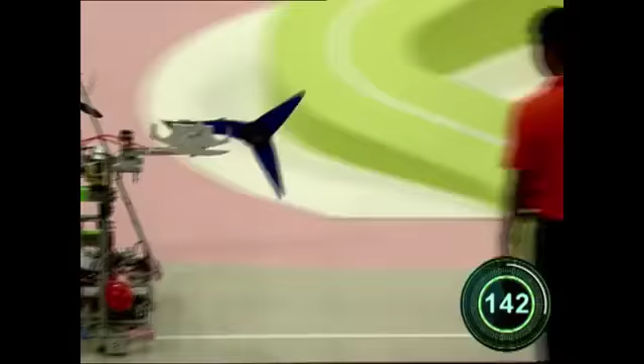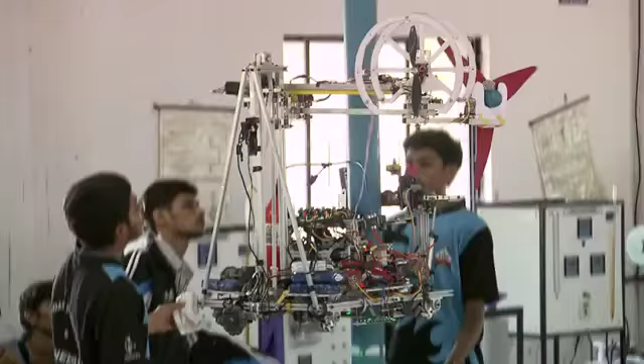It's ROBOCON time again, where human intelligence and the precision of machines join hands to put up a magnificent display of technological advancements in the modern world. Clean energy recharging the world was the unique theme chosen for this year's contest, emphasizing the need to use environment-friendly energy resources. The game field was a beehive of activity, and the eagerness of contestants and curious spectators was approaching a crescendo.

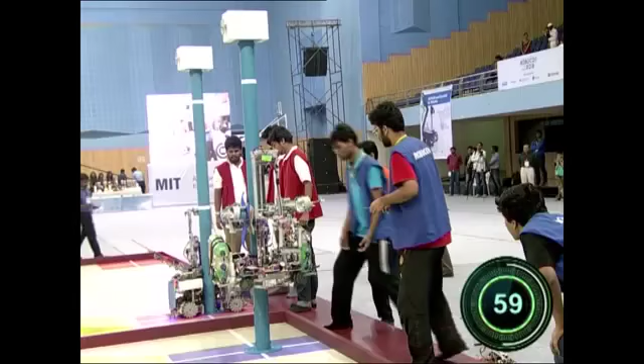The battle for supremacy was about to begin in this unique arena. Expectations were running high for both teams as the final match of National ROBOCON 2016 was about to begin. The battle was tough, with many make-or-break moments. 5, 4, 3, 2, 1, start!

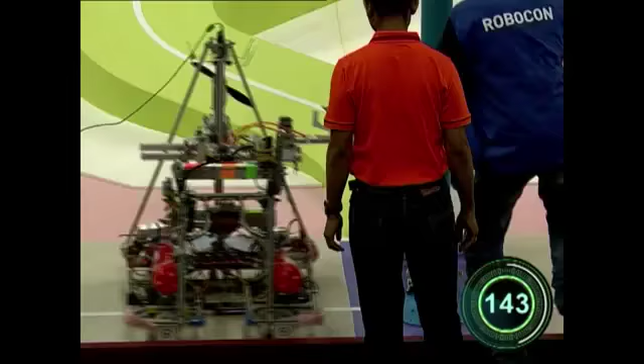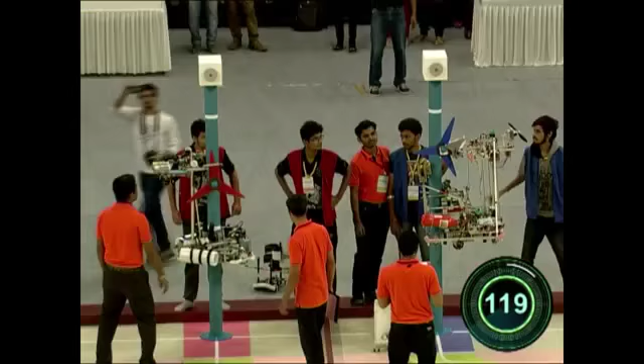Vadodara Institute of Engineering and College of Engineering Pune were two equally matched opponents, trying to outdo each other to win the coveted title of National ROBOCON Champion. It was a close match that could have gone either way, but finally the team from Vadodara Institute of Engineering emerged as the national champion in ROBOCON 2016. It is Vadodara! The Techno Champions of ROBOCON 2016 come from the city of Vadodara.

Vadodara was previously known as Baroda, the third largest city in the state of Gujarat. This city is a unique blend of ancient lineage and modern marvels. Home to the Gaikwad dynasty, the city has many structures like the Maharaja Palace. The Lakshmi Vilas Palace is a standing monument of the royal lineage of the city and is home to the Maharaja of Baroda and his descendants.

Known as an important cultural and industrial hub in Western India, this city is also home to the largest university in Gujarat.

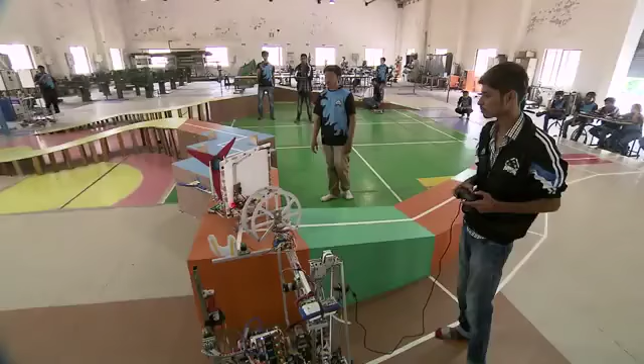One such premier institute is Vadodara Institute of Engineering, or VIER. Vadodara Institute of Engineering was established in 2009 with the objective of giving value-based quality education to students. The institute is situated in a serene and picturesque campus spread across 31 acres, a perfect setting for young and budding technocrats who wish to widen the horizons of their knowledge. Amongst these knowledge seekers were the national champions of ROBOCON 2016.

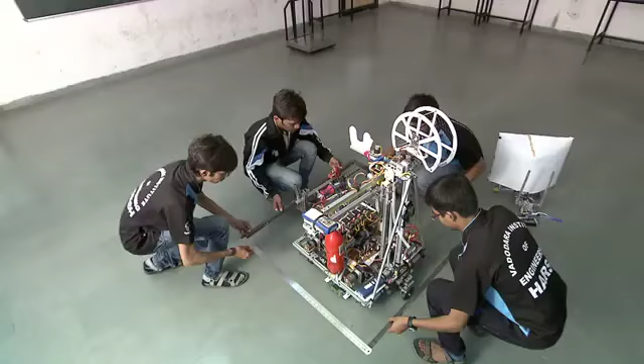A winning team is a unit that has perfectly achieved unity in diversity. This thought drives Team VIER, which has a perfect blend of students with multiple skill sets, focused on fortifying the team's strength with their individual expertise.

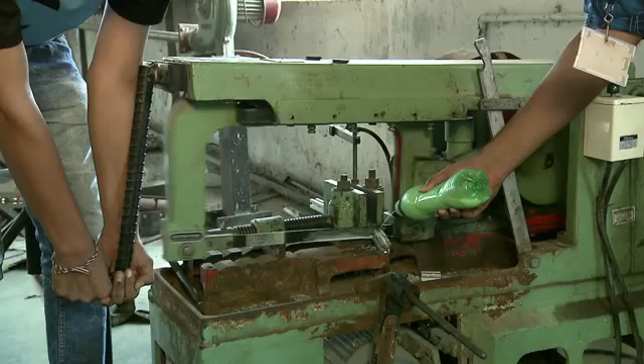Every team is as good as the mentor who guides them. Hence, the role of the faculty members was very crucial in grooming the VIER ROBOCON team.

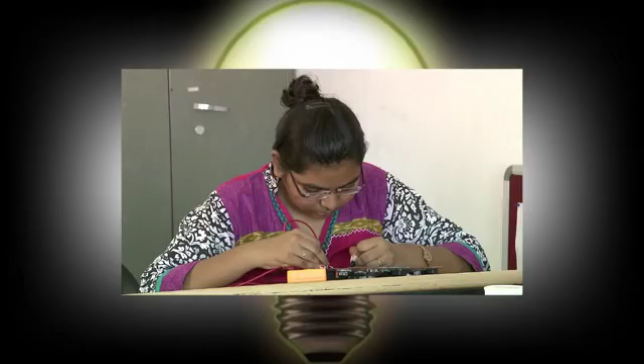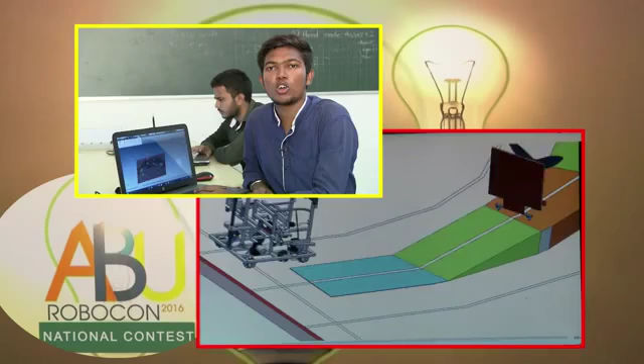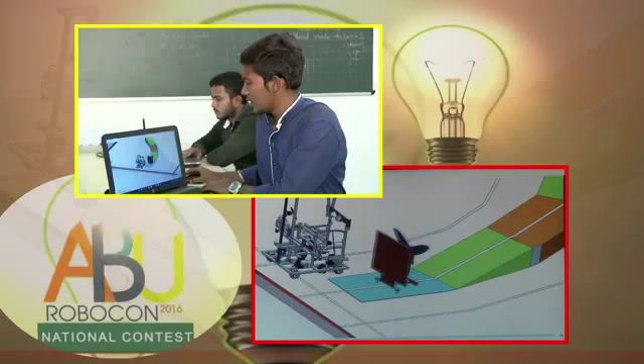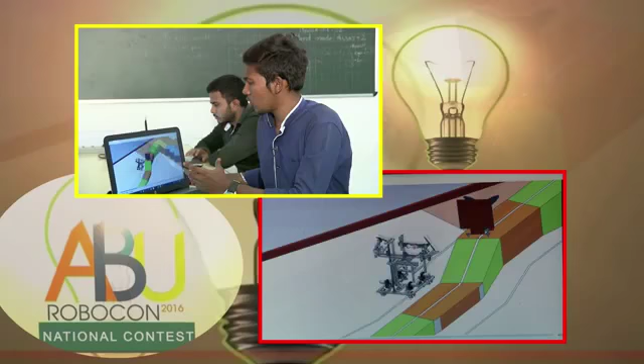Faculty members are the guiding posts in the chaos of creativity and competition, keeping the team grounded and in sync with the unified vision needed to tackle the problem statement at hand.

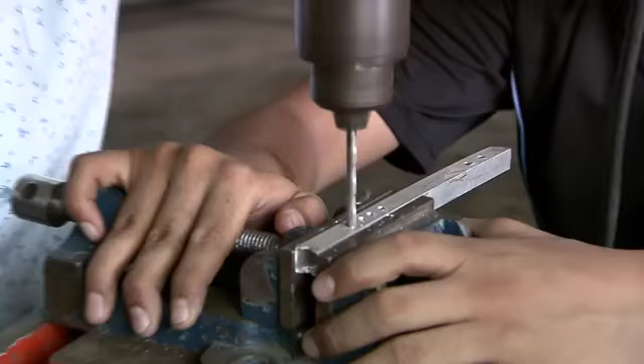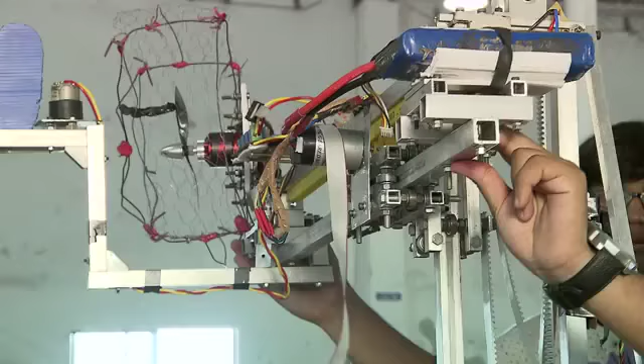Every new problem statement throws up new challenges for the team. First, we select the mechanism of the hybrid robot, choosing between the Omni wheel or Mecanum wheel. We selected the Mecanum wheel for the hybrid motion. Then we select the up-down motion, using a special attachment and mechanism for up-down and horizontal motion. For horizontal motion, we select the rack and pinion mechanism, and for vertical motion, we select the belt and pulley mechanism for up and down movement.

New challenges throw up the possibility of unlearning and starting afresh. Thus began the phase of research and development. The ROBOCON team did not leave any stone unturned to put their best foot forward in preparing for the competition.

The programming algorithm that we have used is PID—if the sensor is on the line, it checks for errors and gives the degree automatically.

Research and development means a lot of knowledge gathering and sifting through data to get useful information, which could go a long way in deciding the winning strategy for the team. This crucial activity was made easier with the help of the state-of-the-art library of the Institute, a treasure chest of knowledge available at an arm's length.

For programming purposes, we are using Bascom AVR IDE, which works with VB script. It is very easy for programmers, so we are using this software.

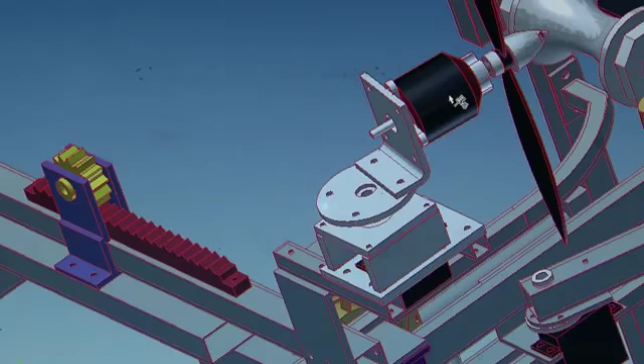Getting the design right is the most crucial aspect of ROBOCON, because design is the key to ultimate victory in the game arena, and a lot of thought goes into choosing the perfect design for the robot.

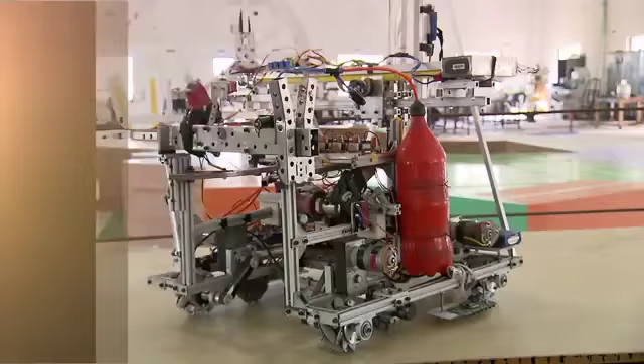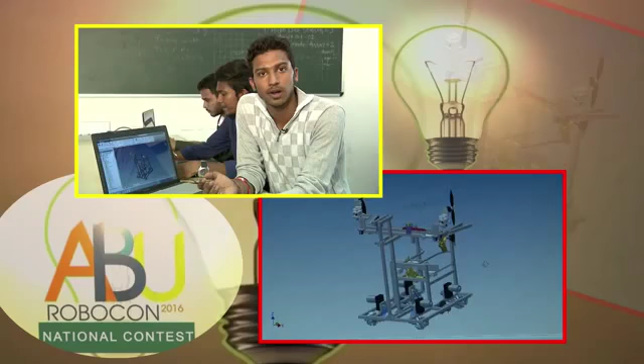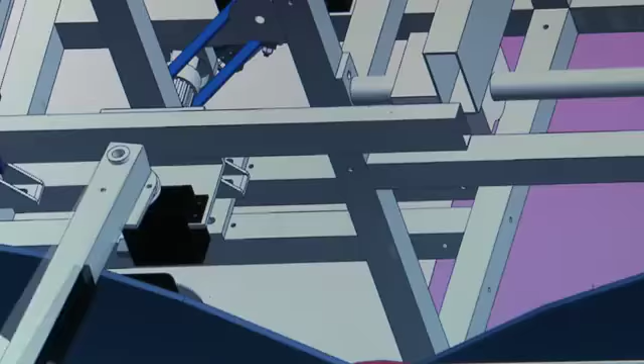Hello, myself Divedandas, and we are team members of mechanical designing. First we do R&D on different conceptual ideas, then make designs according to the criteria of dimensions and weight limitations. The era of virtual designing has made it simpler to try and test various design ideas until you narrow down on the perfect one for your team.

My name is Kishan Ogase, and I am showing machine operation. Generally, we use extrusion sections in our robots, so it is important to cut those sections very accurately with the right dimensions and higher surface finishing. We use this sawing machine to cut down those sections—you can see the surface finish here.

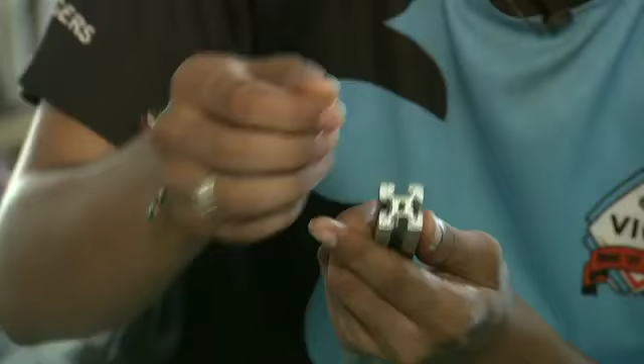It's very smooth and very high accuracy, so we can easily insert the nut inside these sections. This way we can do the assembly very simply.

The right design is just the first step in a big journey in the world of robotics. The actual building of robots is like giving birth to a child and watching it grow day by day.

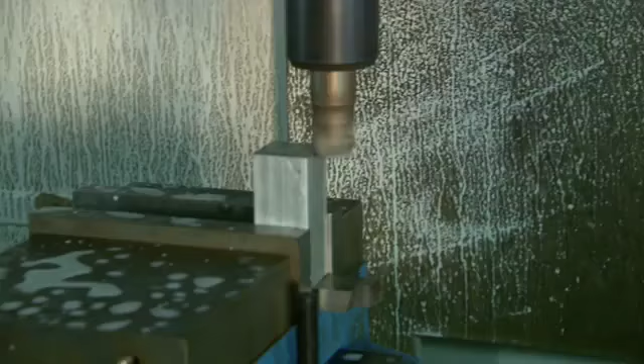My name is Dhaval Patel. We bring all our aluminum sections, bearing house materials, and shaft materials which are used in our robot from here. We bring aluminum section which is used for giving motion in horizontal and vertical direction. We also make bearing house material from this material, which is of thickness 19 mm to 20 mm, used for giving motion in our robot.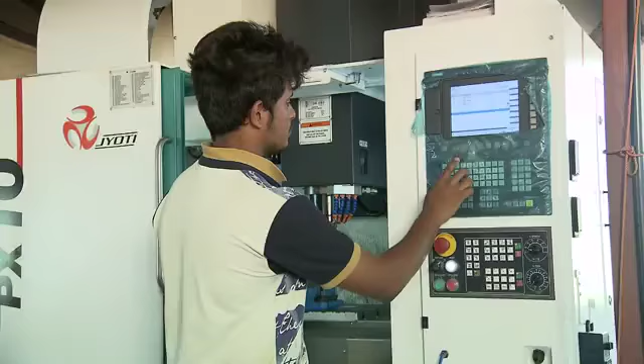Getting just the right components to serve the right purpose is an unending search. These are the very components that ultimately decide the optimum performance and quality of the robots built by the team.

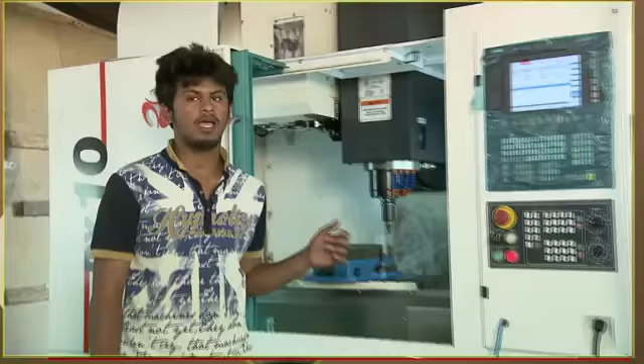My name is Biren Trapasya, I am operator of the VMC machine. We are using this machine rather than a simple milling machine because its accuracy is very high, up to 0.001 mm.

Bringing the hardware to life in a literal manner is the function of the software in a robot. Software is the heart and soul of a robot. Bringing robots to life is a job entrusted to the best programming brains in the VR ROBOCON team.

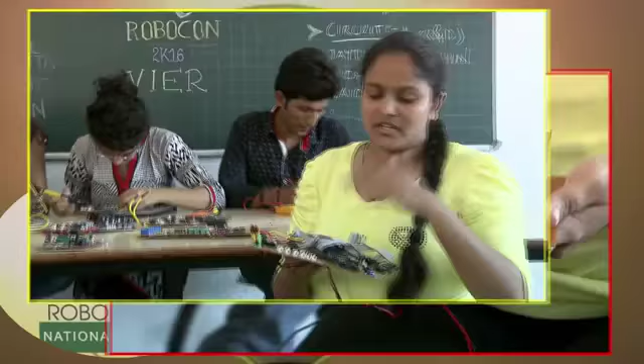After the PCB designing, this board comes to this size. In this circuit we can use either ATmega 128 or ATmega 2560. This circuit is reliable for both controllers at any time.

Once the robots are live and breathing, the stage of intensive testing and rectification comes into play.

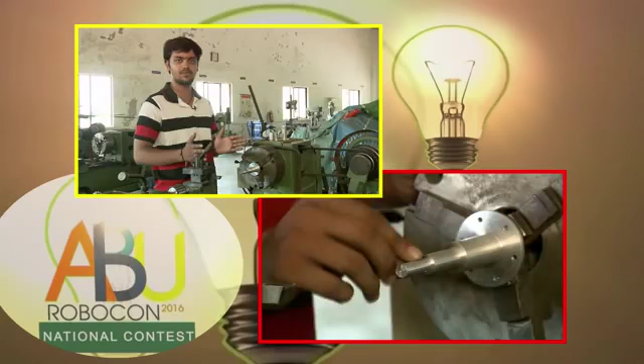My name is Mehul Rana and I have been a participant in ROBOCON for the last 3 years, and I am the lead operator in my team. I have been making different types of shafts for the last 3 years, and according to different considerations of the robot design, I make different kinds of shafts like this and this. We make these to, generally, couple the motor with the wheel.

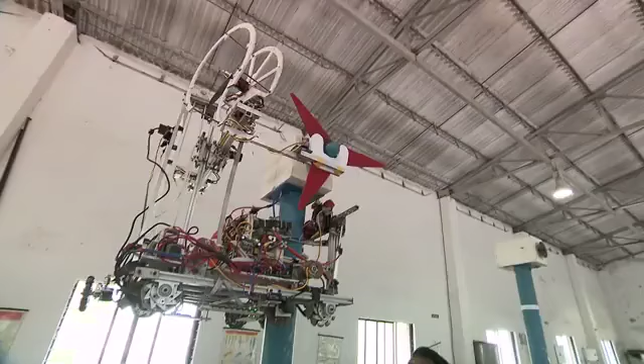This is a stage of many trials and tribulations. There is much heartbreak too at this stage, as at times the team has to go back to the design stage to get the perfect working machine to suit the task at hand.

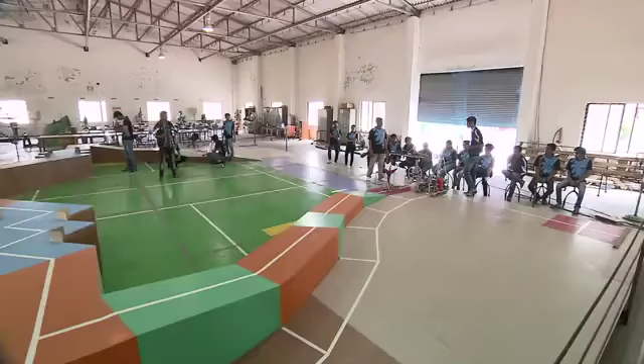After numerous iterations of testing, the robots are finally ready to take to the game field. Once the field was set and the machines were in action, the team members were gleaming with pride.

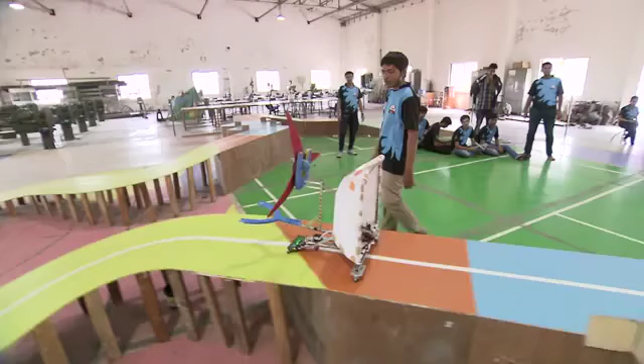After Eco Robot reaches the wind turbine station, Hybrid Robot gets the wind turbine propeller from Eco Robot. Then Hybrid Robot climbs the wind turbine pole and assembles the wind turbine propeller onto the wind turbine engine attached at the top of the pole. The team that successfully assembles the wind turbine propeller first is the winner of the game. This type of winning is called Chai-Yo.

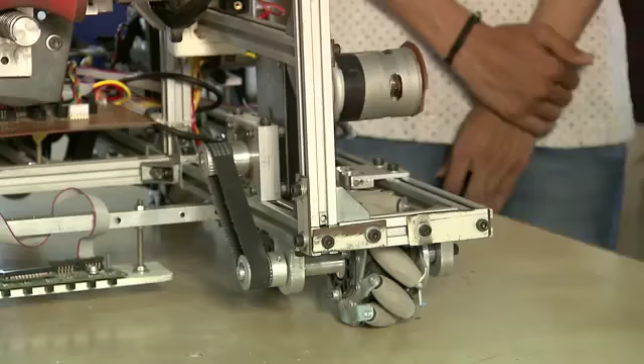This is the mecanum wheel, and we have used the belt pulley mechanism for this motion. The advantage of this belt pulley mechanism is that if we change the ratio of the pulley, we can get different speeds. This is our arm. We have given vertical motion to this arm using the belt pulley, and for horizontal motion we have used a rack and pinion mechanism to move this arm horizontally.

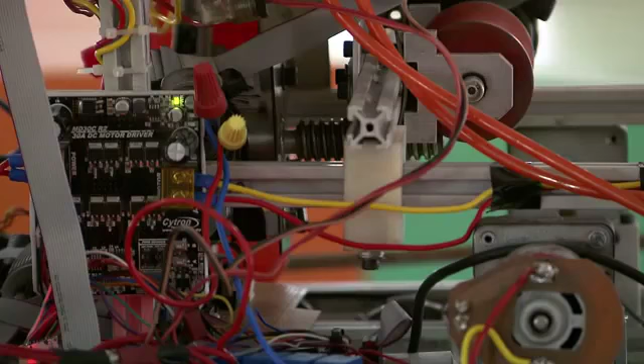Then this is the climbing mechanism. We have used two rollers for climbing. Using a lead screw and motor, we tied these two rollers to the pole.

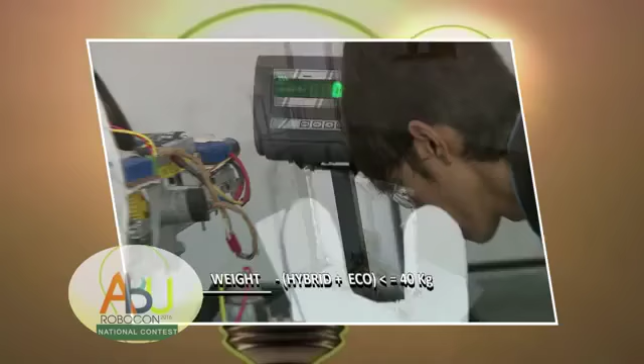It is the result of the hard work of our students with dedication that we won ROBOCON 2016 at Pune. It's our great privilege that now we are going to represent India for the international event, and we hope our students have worked very hard day and night, so we are going to earn some credit for India and our ROBOCON team. Congratulations and best of luck, ROBOCON India.

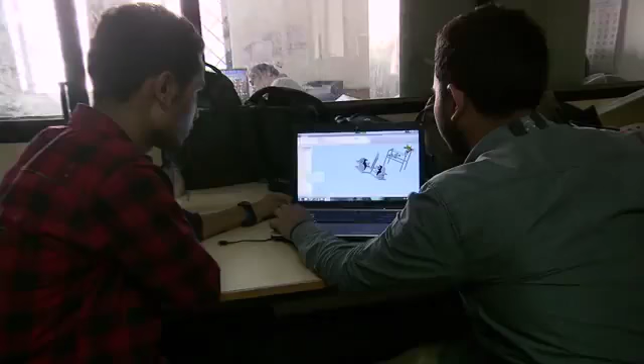As the days went by, the ROBOCON cell became a home to these enthusiastic students, and the buddies in the team became their family members. They spent more time with their ROBOCON family than with their actual families.

The successes and failures of the team were moments of special bonding for the team, as the spirit of unity is fortified even more in such tender moments.

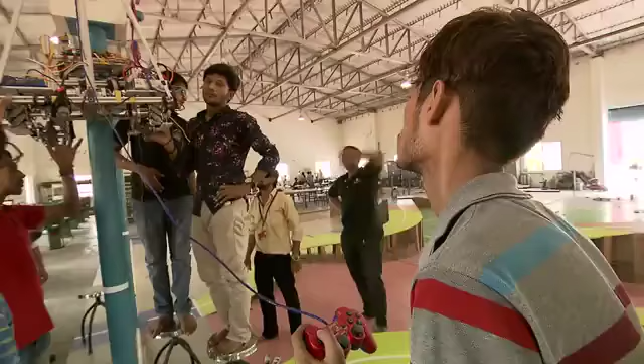As the preparations for the contest reached a crescendo, there were numerous moments of anxiety and self-doubt, but the solid and unconditional support from loving parents and guiding teachers kept the team continuously encouraged and motivated.

Hi, I am the instructor of the ROBOCON team of Vadodara Institute of Engineering. We are about 70 students in our team. We have worked hard and won the National ROBOCON 2016 of India, and now we are going to represent India at the international level. So we are very excited and doing more hard work. Hope we will perform our best.

All the hard work of Team Veer led them to the national championship title. And now, Team Veer are ready to fly to the next orbit of success as they prepare to recharge the world with clean energy at International ROBOCON 2016.